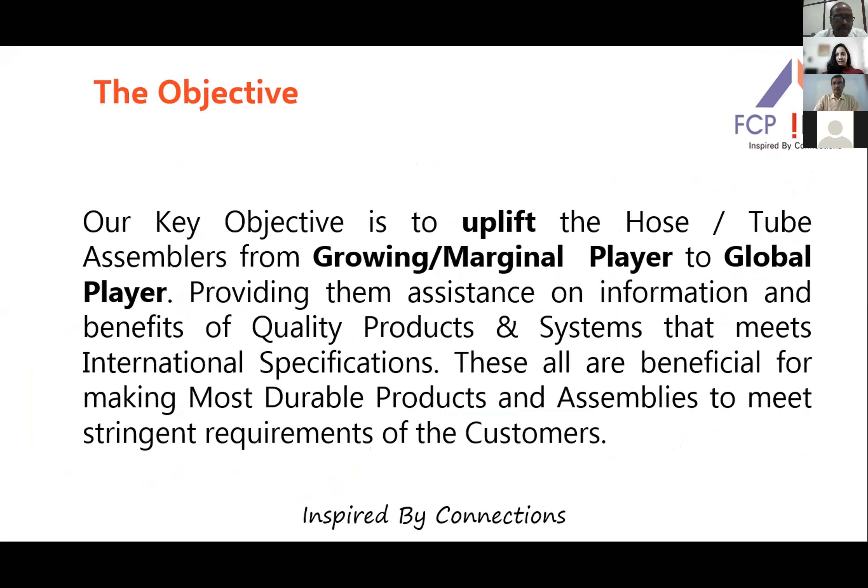These are all beneficial and most durable products and assemblies to meet stringent requirements for customers. What we do for the FCP community is assess their facility and look at the optimum shop floor layout.

Then we support selection of the right hose assembly machines, tube assembly machines, support on getting correct spares and accessories for machines, and assistance on procurement of hoses, end connections, dressings, tubing, seamless tube connections, etc.

Then a more important factor: operator training, which is one of the biggest hurdles - Poka-Yoke, fail-safe plans, training on hose assemblies, contamination control, which may be one of the subjects we're discussing today, basic and advanced hydraulic training which is also necessary to understand the basics, effective safety practices, and a complete training on safety methods.

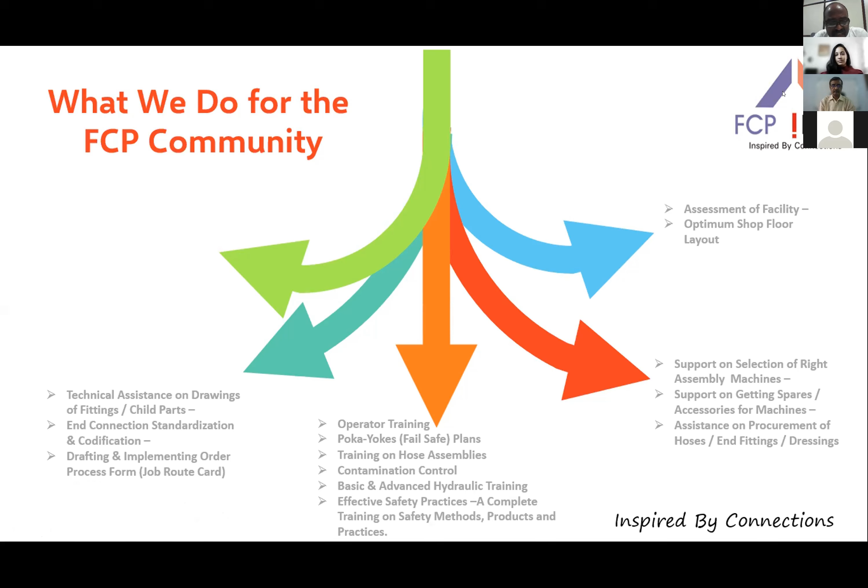Practices, methods, products and practices. Then technical assistance on components, drawings like hose fittings and all other child parts, end connection standardization, its codifications, drafting and implementing order process forms, job route cards, etc.

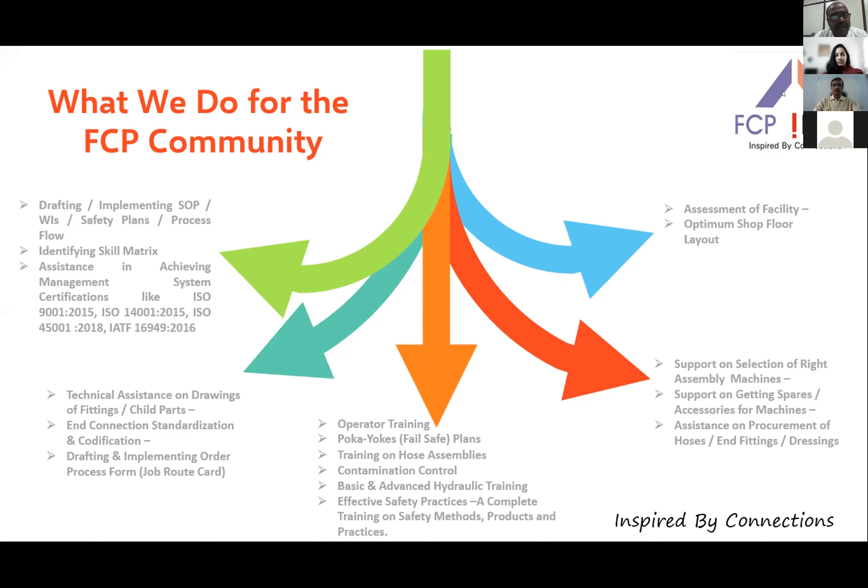Then drafting and implementing standard operating procedures, work instructions, safety plans, process flow, then identifying the skill matrix, assistance in achieving management systems. Most of you are certified in ISO 9001, but also ISO 14001, 45001, then IATF, etc.

We also support our patrons - maybe we are describing the subscribing program also. We are supporting them to clear the stockpile, the dead inventory what we call in common, and e-procurement tenders globally and especially on the Indian subcontinent.

Then FCP Times - we are coming up with a magazine called FCP Times with the latest information on projects and products, then the latest methods and techniques on hose and tube assemblies, then a global survey report on hose assemblies, fittings, hydraulic fittings, etc.

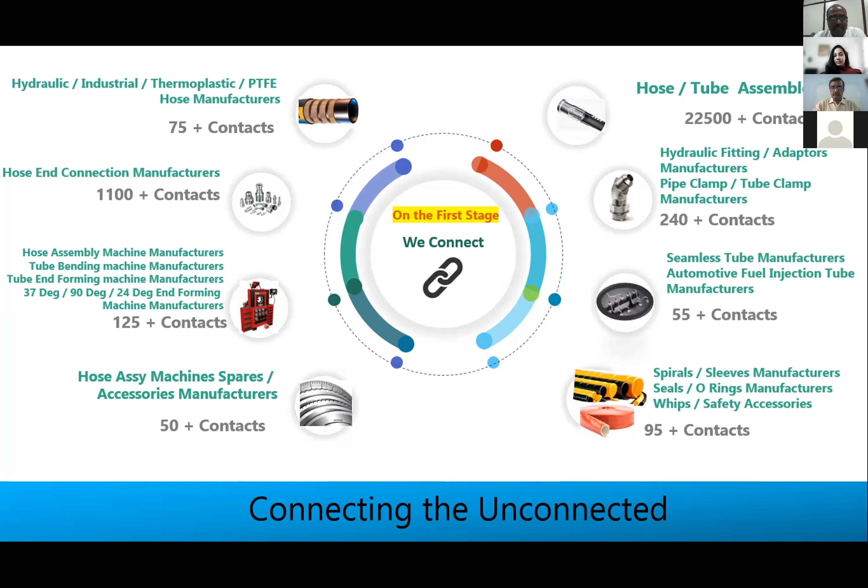The basic agenda is to connect the unconnected. There are about 75 plus hose manufacturers, 1100 plus hose end connection manufacturers, 125 plus hose assembly machine manufacturers, 50 plus hose machine spare manufacturers, around 22,500 hose assemblers across India, 240 plus hydraulic fitting manufacturers, 55 plus seamless tube and related tube manufacturers, 95 plus dressing manufacturers - what we call spirals, fire sleeves, whips, etc.

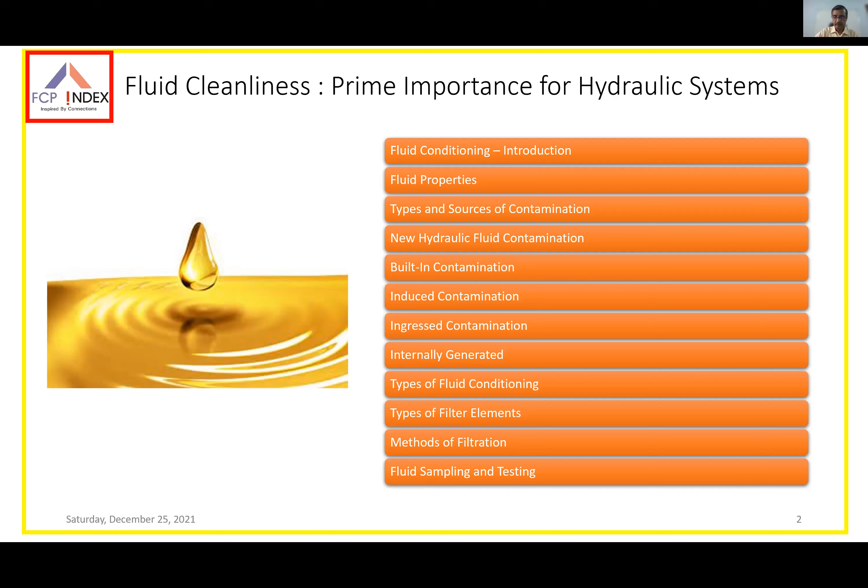Right. So as we all know, fluid is the heart of any fluid power system. In power transmission, we are basically converting one form of energy to another form. It could be electrical energy or thermal energy that using engines we talk about. And yes, we convert this energy into mechanical energy through the fluid as a medium. So fluid has a very important role to play as far as hydraulic systems and pneumatic systems are concerned. So today we'll be discussing more about the fluid cleanliness with respect to hydraulics.

So as we all know, majority of the failures that we encounter in a hydraulic system is mainly because of contamination. Just to give a number, about 75 to 80% of the failures are mainly because of the contamination. So what is the impact or the consequence of having this contamination in a fluid power system? Let's try to understand that.

So this has a direct impact on the reliability of the system. If your fluid is not very clean, it will certainly affect the performance or the reliability in performance of the hydraulic system that you're using. Apart from that, contamination also affects the life of various components that we use in a hydraulic system.

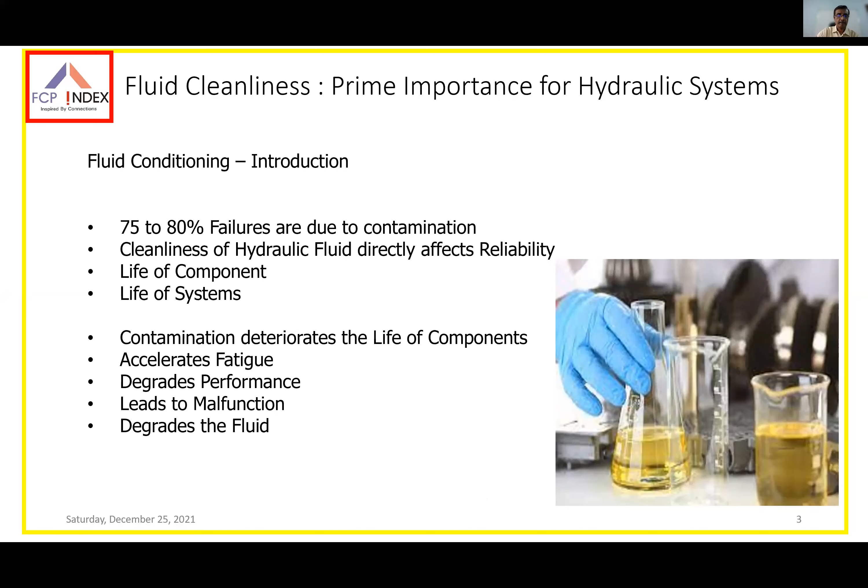Before we proceed further, we need to understand the importance of the fluid and what properties of the fluid we need to consider. As I mentioned, the main purpose of the fluid is to transmit power, so power transmission is one of the key factors we need to consider. Then comes sealing, meaning the fluid itself should act as a sealing agent so that it doesn't pass through the clearances and affect the volumetric efficiency of the system. Power transmission is key because that's the purpose for which it is being used, acting as a medium.

Sealing means the fluid should be such that it doesn't leak out easily through the clearances. Now, why is sealing important? Let's talk about a piston pump, for example. The piston is supposed to reciprocate within the cylinder block or bore, and there has to be some clearance—there cannot be an interference fit. So there has to be clearance between the bore and the piston. But that doesn't mean the clearance should be good enough to pass the fluid through it easily. So the fluid's sealing property should be such that it doesn't easily leak out of the clearances in various components of the system.

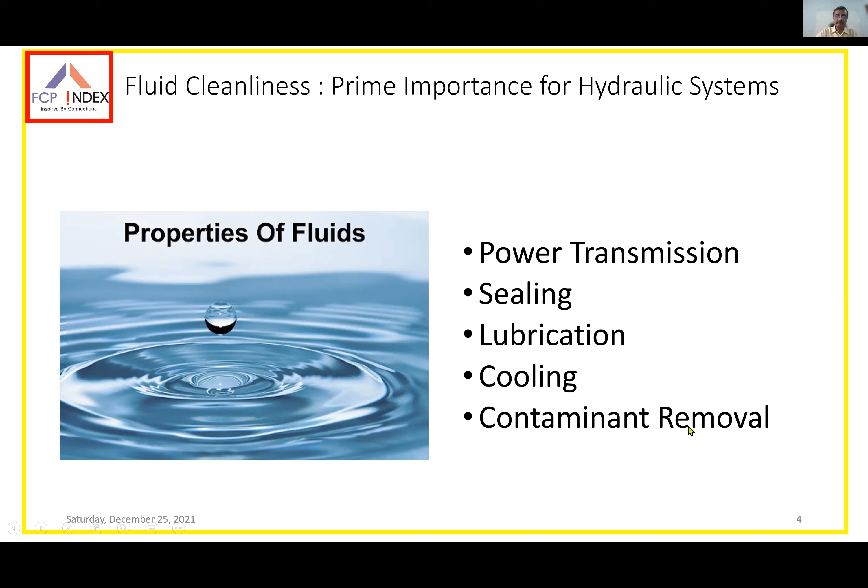Moving on, what are the different types of contamination in a hydraulic system? The contamination can be in the form of solid particles, liquid form, gaseous form, or something gel-like, which is called sludge. We can have that kind of contamination too. Now, how do we define contamination? Can we eliminate contamination 100%, or should it be completely contamination-free?

The definition of contamination is something which is beyond the expected level in the fluid. We cannot eliminate contamination 100%, but we can always limit it to an extent so that we get the maximum efficiency or maximum life of the components as well as the system, and the best performance and efficiency of the system overall.

Let us try to understand some of the types of contaminants that we generally encounter in fluids. We have non-metallic particles, for example dust, swarf, sand. All these are non-metallic particles which are generally commonly found in any fluid. What are the means through which these things can get in? We'll try to understand it later, but these are some examples of non-metallic particles.

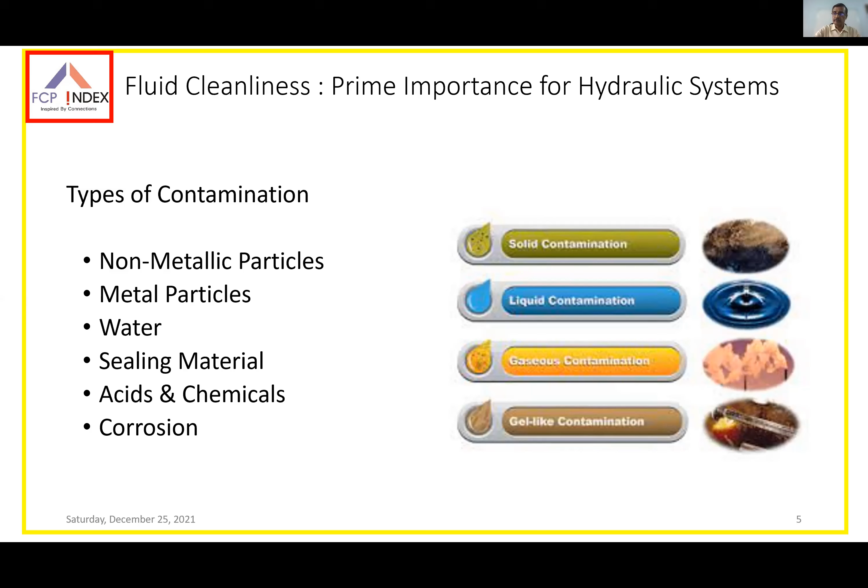So what are the different sources of contamination? How does this contamination get into the system or the fluid? It can be because of the new hydraulic fluid - yes, new hydraulic fluid also is not absolutely clean. We'll try to understand how exactly that is. Then it can be built-in contamination, induced contamination, ingress contamination, and self-generated contamination.

New hydraulic fluid means, as we all know, the fluid that we use is petroleum-based fluid. So where do we get this oil from?

Where do we get this fluid from? We need to understand that it is a product of the petroleum industry. The first thing is the oil is basically taken out from the sources available.

We have the oil wells through which it is taken out, and then it is sent to the refinery, where it undergoes different processes. Then it is stored in large storage areas, moderate areas, and then packing is done, barreling is done, and even small packagings are done.

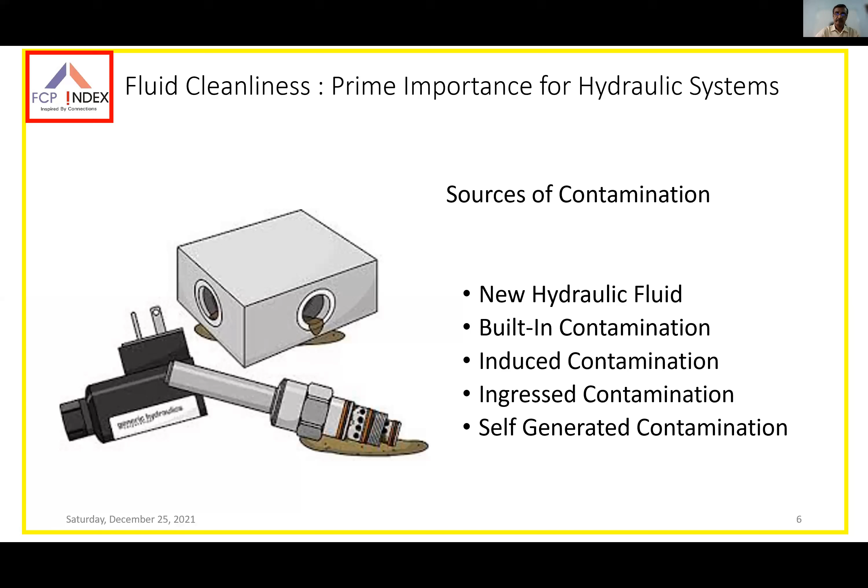So how do we understand about new hydraulic fluid contamination? It may not be very clean as we assume. When we talk of hydraulic oil, we may say the oil looks very clean, but looking clean or the appearance of being clean doesn't mean that the oil is really clean.

What is important is to understand, as we learned in the earlier slides, what form of solid particles are there, what type of liquid is ingressed, and what types of gases are present in this fluid. All these unwanted things could be chemical, water, or some gases, or solid particles in the form of metallic or non-metallic things, and all these unwanted items beyond the limit are not required.

It is certainly present because, as I mentioned previously, the oil fluid is handled through various stages. So all these stages come into picture, and at every stage it is handled, there is always room for contamination to get ingressed or induced into the fluid. So the more the handling process, the higher the level of contamination will be.

There are certain manufacturers who also give a certain standard grade of oil. They say that it has been purified to a certain level, and then it is supplied. Now, generally when we talk about the cleanliness of the oil by vision, a good eyesight of a human being which can see the smallest particle is about 40 microns.

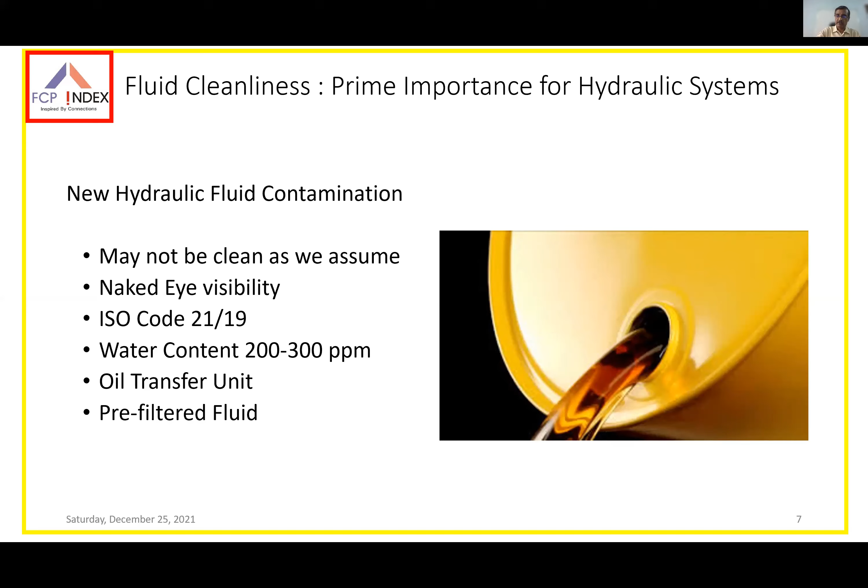What are the different types of built-in contamination that we generally see in the fluid? If you see the details here, the manufacturing and assembly process generally adds to certain contamination. When we say manufacturing, yes, we manufacture the complete system, so in the process of building the complete hydraulic power pack or assembly of components, this involves manufacturing as well as assembly. Manufacturing can mean manufacturing of the components and manufacturing of the power unit.

Assembly, of course, refers to the assembly of the components as well as assembly of the complete power pack, or power unit. So these are the areas where the contamination can get easily added. A lot of precautions have to be taken in this particular process of manufacturing and assembly.

Then comes the machining operations. A simple example I would like to quote: the power pack or power unit that we manufacture is also machined. So any residue of that machining operation, if left out, is considered as a built-in contamination. It can be like the drilling operation or some grinding operations. All these can lead to some residue of the machining operation or process that we carry out.

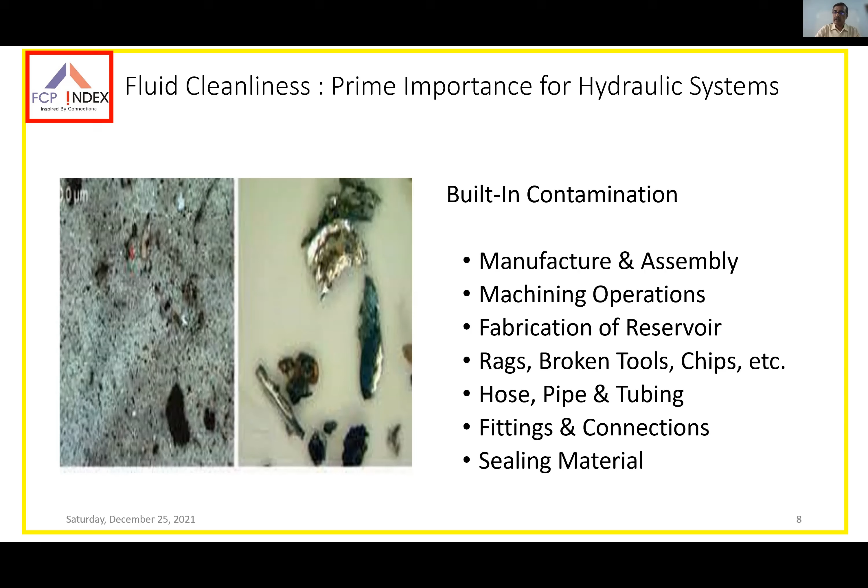Induced contaminations - now, when we say induced, what exactly do we mean by that? Inducing means that in the process of operation, it is getting in through an external source. Built-in contamination is internal, occurring during the process of operation, while induced contamination comes through external sources.

So whenever you are doing maintenance of a hydraulic system, there is a possibility that in the process of carrying out the maintenance - for example, let's take a quick example of replacement of a filter element. If you have to replace a filter element, the filter assembly has to be opened up. Now how you open it up, in what conditions, how do you keep it during disassembly, how do you then handle the filter element - the clogged one has to be kept aside, but how do you handle the new filter element, how would you have stored it, and what precautions are you taking during assembly. That means right from disassembling the filter assembly till placement of the filter element, and again reassembly of the complete thing.

Similarly for maintenance, let's say you're topping up the hydraulic fluid. What is it that you are doing? How are you handling the fluid? When we talk about a heat exchanger, let's assume that scaling has occurred and the efficiency has gone down. We generally try to descale it - if it's a shell and tube type cooler, we try to descale it. So when you open up a heat exchanger, how do you handle it? What precautions do you take? All these things will matter.

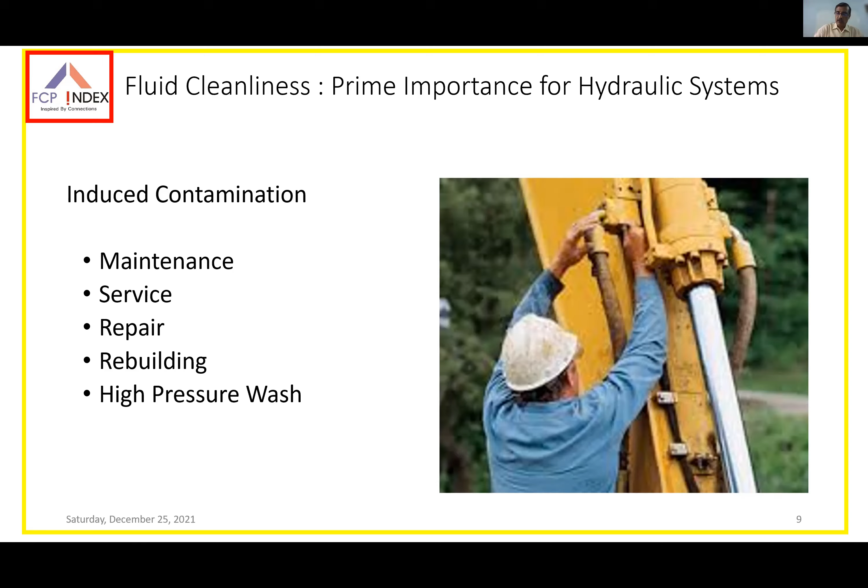So coming to the next point, ingress contamination. There are different types of contaminants that get ingressed into the system. It can be directly into the reservoir, or it can be through some of the components also.

The ingress type of contaminants - generally we have airborne dirt, which is the most common one, especially if it's working in the open environment, because there it is more prone to exposure to dust. And the key component through which this airborne dirt can get ingressed is the air breather.

Generally we have to have a proper micron rating of air breather - about 2 to 3 microns is the rating we talk about. It can hold particles beyond these ratings.

Then comes the moisture. This is again another key thing, because when moisture gets in, due to condensation it gets converted into water, and the water gets ingressed into the reservoir. This has to be taken care of.

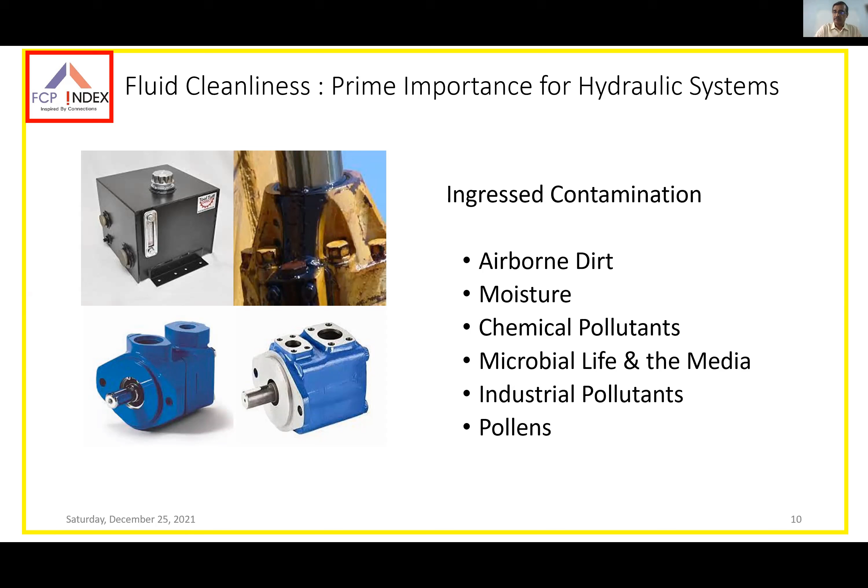Internally generated contamination - yes, this is again one of the most important. Internal generation of contamination can happen because of wear and tear of the component, and it can also be because of fatigue. Wear is well known to us, because over a period of time, if a part of a component is subjected to movement, and because of friction between the mating components, it can lead to wear out of the surface area.

That is one important aspect, and the second is fatigue. Fatigue means if a component is subjected to continuous pressure or continuous force acting on a particular area, that surface area can get weakened. Every component has a life, but there are always clauses that it is subject to so and so.

So there are various things - pressure is one among them. It can be the flow, it can be the duty cycle, it can be the temperature, the sudden changeover of loads, or the pressure spikes. So various factors will matter on the fatigue.

But fatigue means every component has a life. So anything that works in this world always has a life.

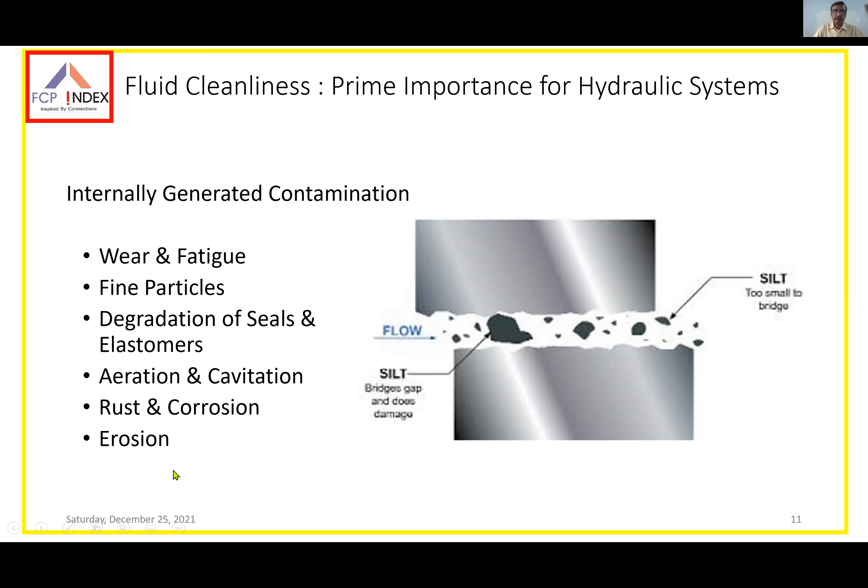So what are the different types of conditioning we talk about? We talk about particle removal, air removal, water removal. Similarly, we also talk about heat removal.

Particle removal - yes, we need to have the filter for particles. As we understood, we have different types, whether induced, ingressed, or built-in forms. Any of these three forms can get in, so that has to be taken care of. Whatever mechanism we have for conditioning of the fluid, we need to ensure particle removal is one of the key ones.

Then comes silt removal. Again, this is pretty much similar to particle removal, and silt also has to be removed. Air removal, because that can lead to aeration, so air removal is another important point. It can be air removal or even some gas removal also. So we need to have an arrangement for that. Not a very common one.

The most common ones are the particles - mainly particle removal that we talk about. The water removal is there, but that's a very negligible value because the type of filter elements we use are generally not compatible for removal of water in most cases. But if there is something specific, if the customer has understood the environment under which their system is working, they may ask us to recommend an appropriate filter element for that kind of fluid conditioning.

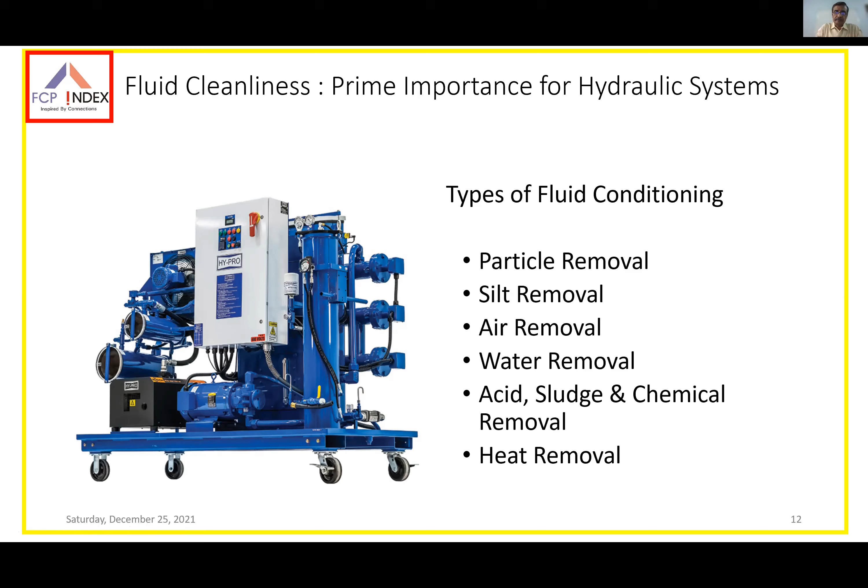So what are the different types of filter elements? Let us try to understand this. The basic classification is mechanical filters - we talk about mesh type filters. We call it mechanical filters, or some simple mechanical element that is there for a certain amount of grading. That is what we talk about generally.

Then comes your absorbent filters. Absorbent filters will remove the particulates, and some amount of free water is also removed in this - that's what we call absorbent. And then we have the adsorbent - adsorbent will generally remove the free water and the oxidation byproducts, like we discussed about the acid, sludge, and all those things. So all such things can also be removed using the adsorbent type of filters.

This is as far as the typical construction or the type of material used for manufacturing the filter elements that we talk about, in general. Apart from this, how do we classify the filter elements is with respect to their ratings.

Now, what are the different types of ratings under which we get filter elements? The most common ones are the nominal rating, the absolute rating, and the beta ratio.

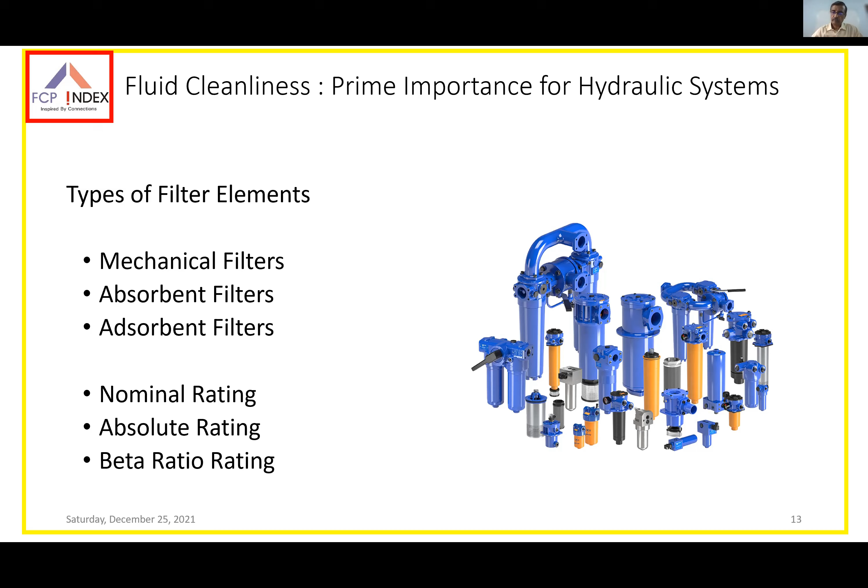Next comes our methods of filtration. What are the different methods of filtration that we talk about? We have different locations for placement of the filter assemblies, and these locations are basically the most common ones that we see in any system.

This is a return line filter. Then we talk about the pressure line filters, the suction line filters, the offline filters, bypass line filters, and then the batch process and reclamation.

Return line is the most common one, as I said, whatever the flow is coming out. So here we can see this is your return line filter. Whatever fluid goes from the pump into the system and then returns back to the reservoir, much before returning to the reservoir, we try to filter it and hold the contaminants back in the filter element, then release the fluid back into the reservoir or the tank. So that is your return line filter.

Then we have the pressure line filter elements or filtration assembly. These pressure line filters are basically used wherein we have critical components, like for example a proportional valve or a servo valve, where the fluid cleanliness becomes more stringent. We have conventional systems, then systems which operate precisely using electrohydraulics, that is using proportional valves, and then much more critically operated systems wherein they use high frequency response servo valves, where it becomes much more critical.

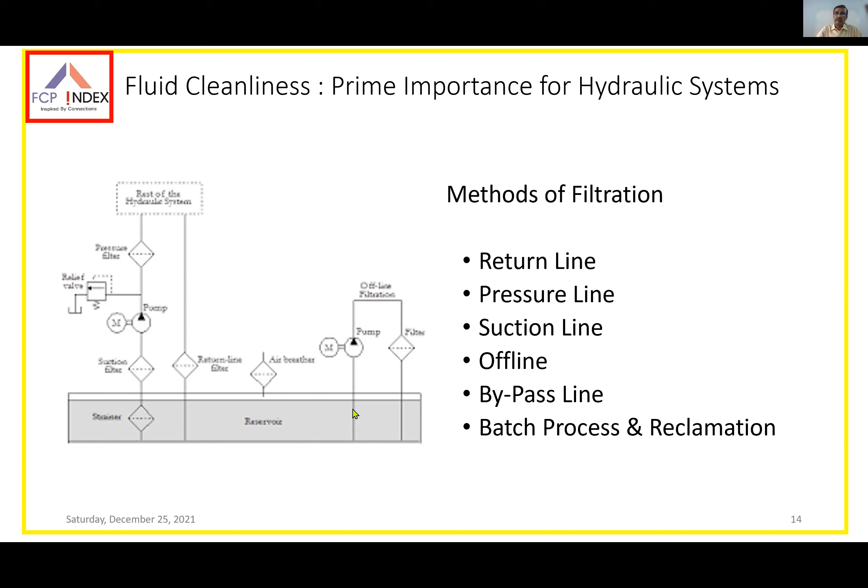So finally we come to the most critical aspect of fluid cleanliness, that is fluid sampling and testing. Now the most important part is, of course, as a system designer he will take care and incorporate filter assemblies at different locations. As you saw in the previous slide, there might be different locations. You might be having all those things, but that doesn't stop you from doing sampling and testing. So generally, technically speaking, we need to do sampling at least once in 6 months for the particle count test, and at least once a year for the properties of the fluid. Now when we say sampling and testing, it doesn't mean only for the contaminants present in physical form, that is the solid contaminants that we refer to.

No, it is not so, because we have discussed about the contamination in 3 different forms: solid, liquid, as well as gas. Liquid and gas may not be visible to you, but these two would cause a change or variation in the properties of the fluid itself.

Contaminants in the physical form can always be checked, maybe once in 6 months, but it is very important to get the properties of the fluid assessed at least once in a year. That is the standard recommendation given in the industry.

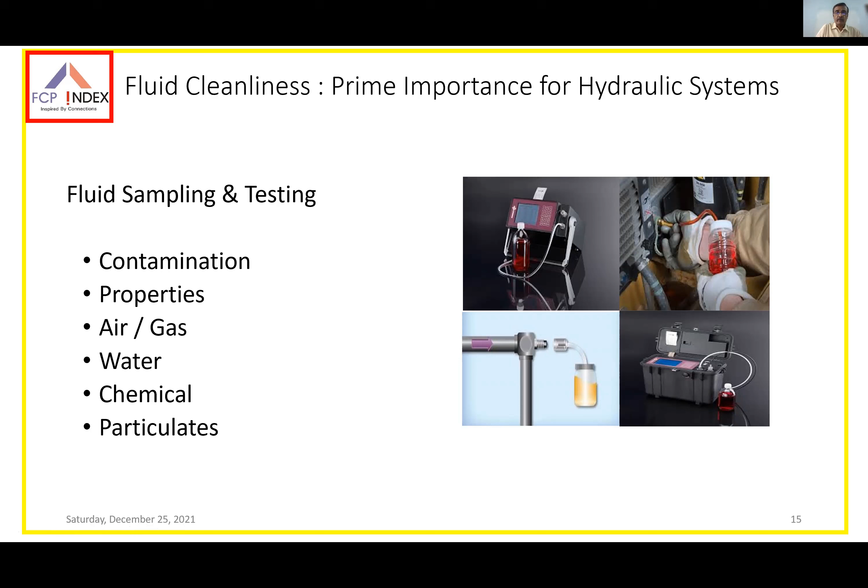So I think with that, whatever points we had highlighted on today's agenda has been covered. And now the forum is open for questions. If you have any questions, please feel free to ask.

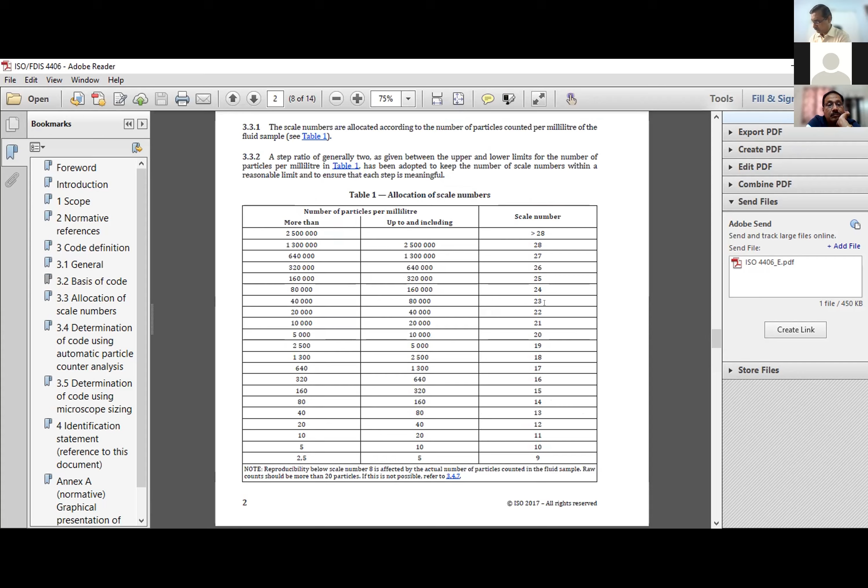So this is a standard, basically ISO 4406. This covers particle size as well as particle count. Yes, both. It is as per NAS 1638. NAS 1638 is the basis of all these things, and ISO 4406 describes it very well.

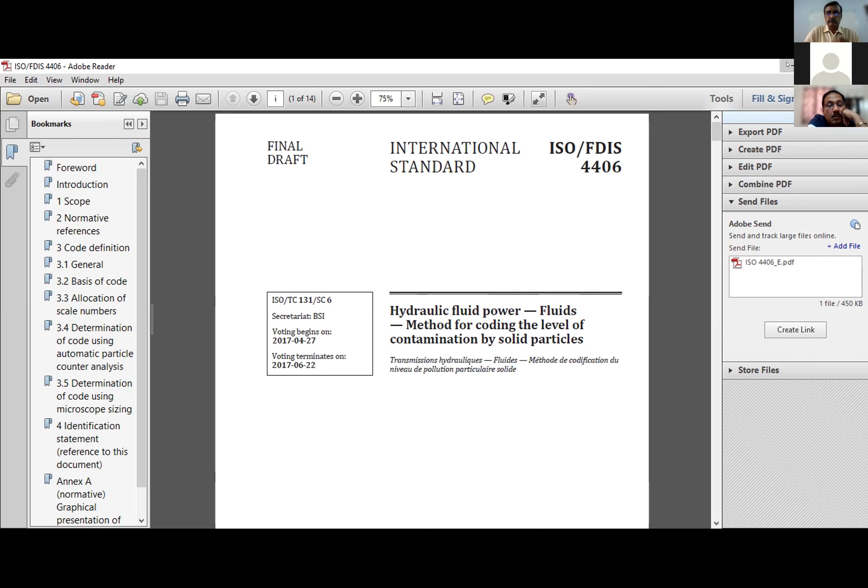Okay sir. Anyone else, sir? One more question is there, Mr. Ashish. Mr. Ashish, are you there? Yes, good evening, Ashish here. I think your question is, do we have any standard specifying the level of cleanliness of fluid as per application of the product?

Yes, it's a very important question that you have asked. The cleanliness level of a system is always decided by the critical-most component that we use in the system. Second thing is, it also depends on the operating pressures of the system.

Now let us say you are using the same set of components for lower pressure application and the same set of components for medium and high pressure applications. What happens is, as the pressure levels go up, the stringency of the cleanliness level will also go up.

So if you refer the ISO coding chart as per the SAE standard SAE J1165, and try to have a comparison of the various codes I mentioned, that coding is mainly for classification, but these codes are generally recommended by the component manufacturers, by various companies.